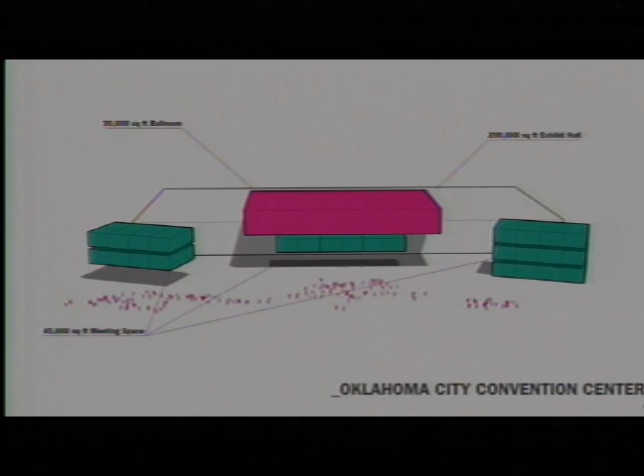We are still meeting the 45,000 square foot meeting room program, the 200,000 square foot exhibit hall, and the 30,000 square foot ballroom. We still have our meeting room program to the north facing downtown. We have a meeting room program to the south anchoring the southern end of the building. And we have our ballroom on top of all of this program, cantilevered over with views to the park. The building is still broken up into three, we'll call it 3.5 levels.

We have the lowest level, which is our exhibit hall, which has our pedestrian entries. We have entries to the north of the building, entries directly across the building, across the park in the center of the building, and into the southern edge of the building to allow for some pedestrian entries down there.

The second level is what we're calling our meeting room mezzanine. It's full of meeting room program. Most of those meeting rooms have access to natural light along the facade. It's where we start to add levels of flexibility within the program, how we can divide up these meeting rooms and create different shaped rooms to accommodate the different events.

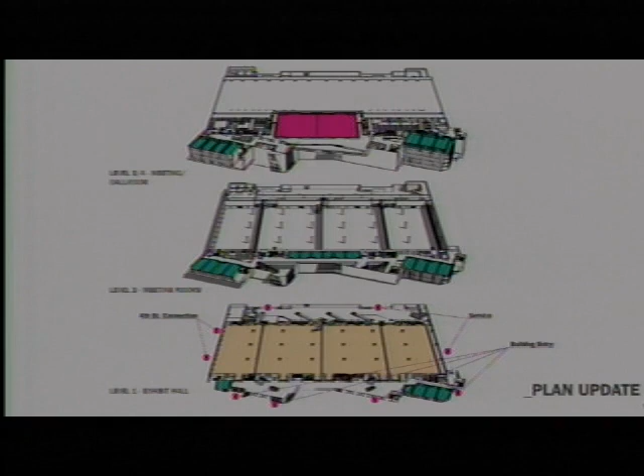And then our uppermost level, along with some meeting room program, is what we're calling our ballroom experience. You can see the purple box up there. The ballroom truly is at the center of the building and does command a lot of attention. You'll start to see how this is influencing some of the architectural moves in the design.

Moving from the design principles to what we're calling our design story, this is the story that's going to start influencing the materials of the building, the architectural forms, and the overall aesthetic of the building you're going to see today. What we've just, through all the times we've been here, it's a shame you don't get to see us do this, because in our office we have images, sketches, and all the research we've done on the site, and just the look and the vibe and the feel of what this means to be in Oklahoma City.

So we've come up with these storylines. One is core to shore: how do you connect the building as an anchor from the downtown corridor to all the development to the south of the building? The next one is the building as the event district: what does it mean for this new convention center, and how does it respond to the potential hotel, the arena, the park development, and how they can connect with each other? And then balanced asymmetry: how does the program within the building start to direct some of the architectural moves and influence the appearance?

And then one of the ones we're most proud of is Earth to Sky. The building truly is unique in that there's not a lot of context around it right now, so the way the building touches the ground, when you see it from the park, and how it reaches into the sky, starts to create a dynamic vision.

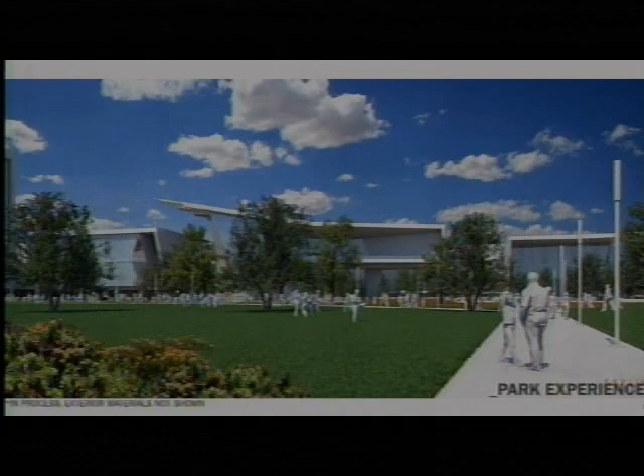So this is that first image many of you have seen. This is standing in the park, essentially right above the amphitheater, looking through the park to the east. You can see the scale of the building and how it rises above the trees in the park, and how the backdrop of the building truly is the blue sky—the building acts as the horizon on the site.

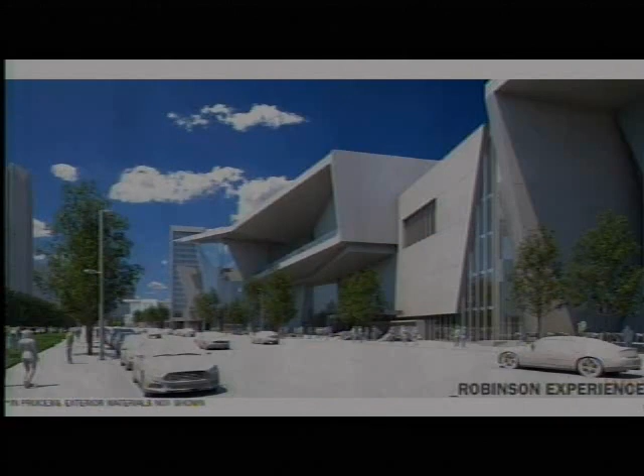This is a good representation of the presence this building will have as the backdrop to the park. Looking north along Robinson, you can see the ballroom's architectural form and how it commands attention while still providing that level of protection for the west-facing condition, anchoring the center of the building.

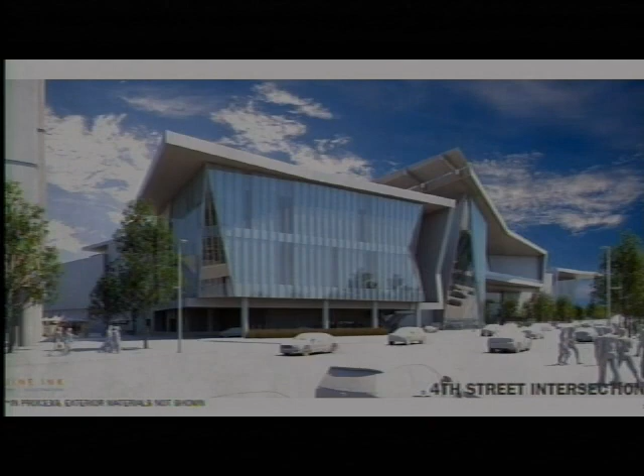Looking south on Robinson, the northwestern corner of the building sticks out and essentially tips its cap to downtown. We've angled all of these meeting rooms to frame specific views to downtown, the park, the Skydance Bridge, and Union Station. This is the first opportunity you see when approaching the building—how it turns its head and looks right at you.

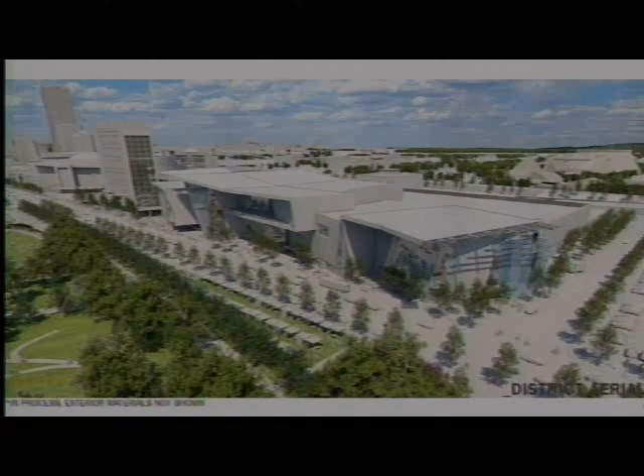It's a dynamic image, exciting because of the scale of the building, and we've broken it down into these unique moments. The building will truly take on a life of its own from these different viewpoints along Robinson.

To reiterate, the event district is something we believe is new for Oklahoma City. When you look at the different activities you can have in the park and how those relate to the expansion to the south, and the potential hotel—obviously the Thunder command a lot of attention here, and Chesapeake Arena has proven to be quite the anchor along Robinson—you see how these buildings can tie in with each other. Our convention center is truly an anchor in this district, and they can maintain this relationship as they develop.

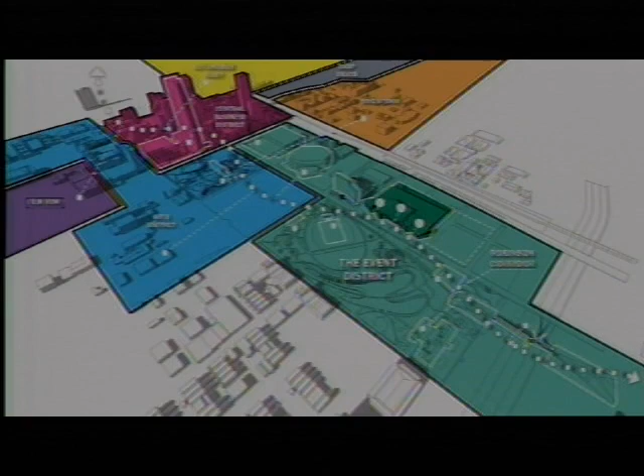It's interesting—when we talk about convention centers, there's an evolution of the building. Convention centers historically were building-focused, so whatever is happening inside, nobody really cares, as long as it's happening inside the building. That's kind of what we have at Cox Center today—it's very stoic and oppressing.

The next generation is event-focused, bringing people into the building and making it a more inviting facility. Where we're at today is city-focused buildings—it's about the inside-out relationship of the convention center and the district, how you let people in and let them out. It's more about bringing people to the center and then sending them out into the city to explore all the amenities around the facility.

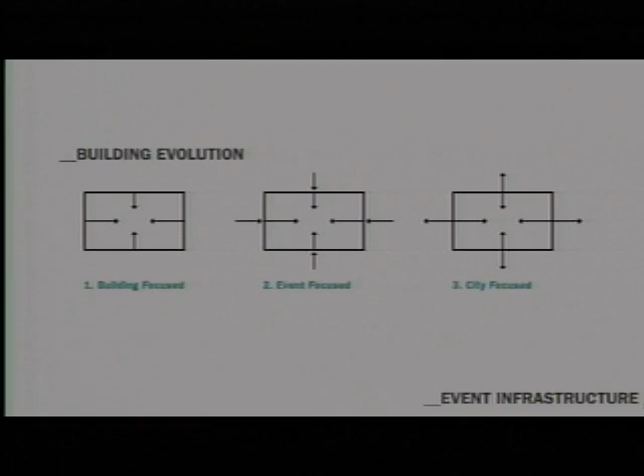To reiterate, we have some of these slides we've been discussing with our subcommittee for quite some time, and we want to show that we're still taking into consideration some of those points even within this updated design of the architecture. We still have our three entries: one to the north, the center entry, and the southern entry.

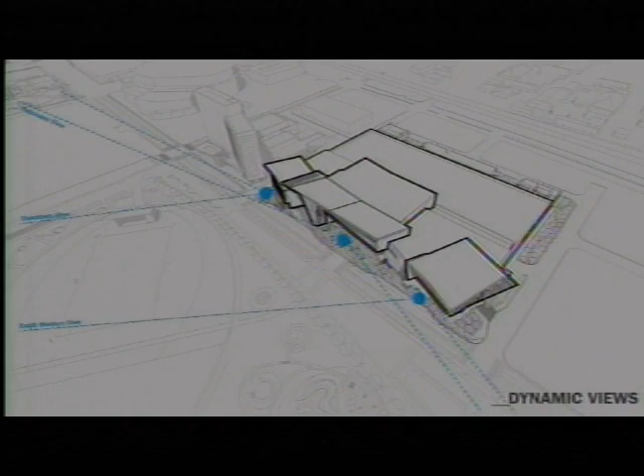The way the building is angled now, we're exposing the interior spaces to some of these dynamic views we've been talking about, specifically the center ballroom view. When standing in that ballroom, you'll have a panoramic view looking west that opens up to the downtown corridor all the way to the Skydance Bridge and Union Station.

From a site planning perspective, because it's such a large site, we're starting to break down the different areas where the building touches the ground. The first is the new 4th Street corridor, which we're calling the Urban Prairie—an outdoor plaza specific to the convention center and hotel. How that building ties in with the hotel becomes an extremely important connection in the event district.

Then there's the entry garden, which we're calling an extension of the park. If you remember, in the park we have a lot of program along Robinson—food trucks, farmer's market, and a lot happening there. So it's our job to respond to that and provide a sister space across Robinson to allow for a back-and-forth relationship.

To the south, we have our Woodland Walk, which we envision as a heavily planted facade—a heavily planted area of the site that adds interest and depth to the southern-facing facade of the exhibit hall as you travel up and down Robinson and Shields.

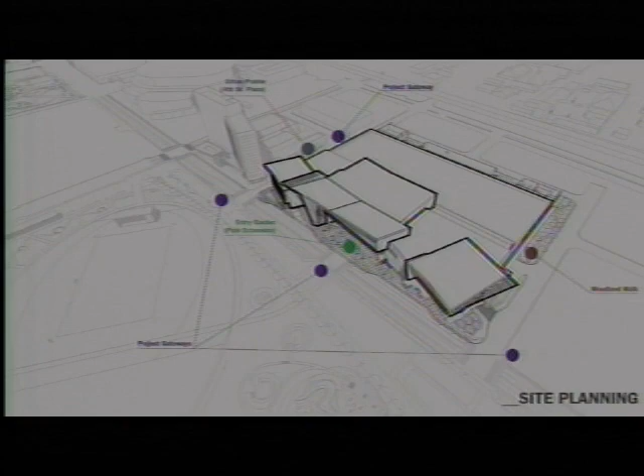As I said before, the building is quite large—the facade itself is approximately 600 feet long, which has a lot of potential to be monotonous and uninteresting. So we've specifically broken this program down into three unique scales.

We have scale B to the north, the stacked meeting rooms; scale C to the south, also stacked meeting rooms; and the ballroom scale, which we're calling scale A. We're being very specific about how the building reads, breaking it down into a more pedestrian-friendly, manageable experience.

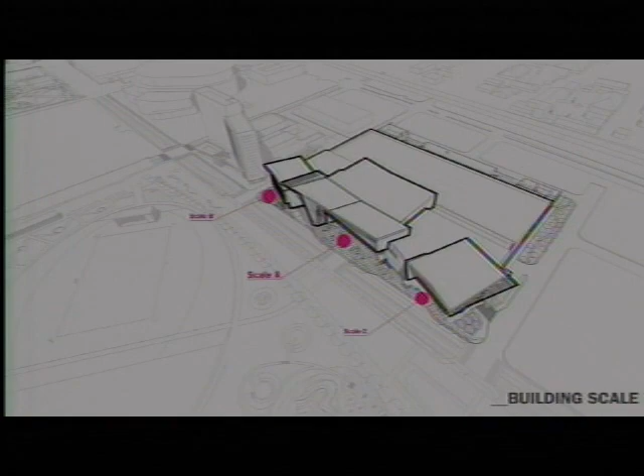The architectural forms are serving a specific purpose—they're a passive maneuver to protect the building from the western-facing condition.

For balanced asymmetry, when we met with our subcommittee back in January, we had almost 40 options, then narrowed down to 12, 8, 3, and finally 1. We created this design together with our subcommittee, shaping how these program areas lay out.

When I go through these diagrams, the first shows the programmatic pods generated with our team, then how those pods influenced the form of the building, and then how we enclose and protect the building.

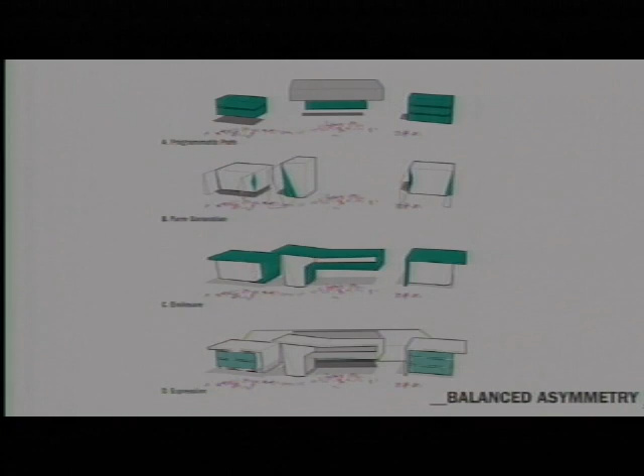After that, the last diagram shows how we can still express that program in the architecture of the building. When you break the design down, it's actually quite simple in its elements, and simplicity is good here because of the scale of the building.

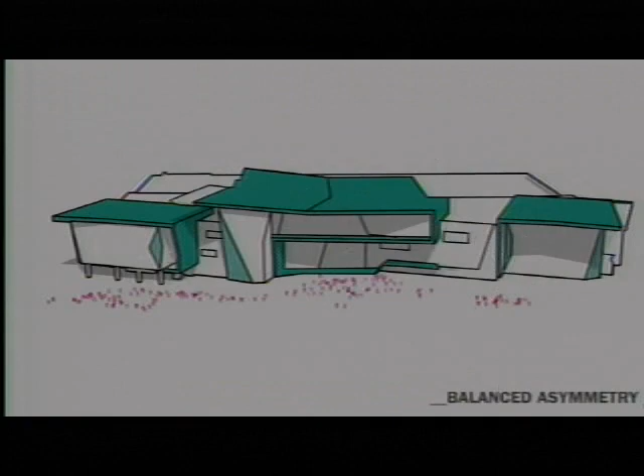As you go back and forth, you can see the blue protective elements and how those start to translate into the actual architecture of the building.

Moving to the 'earth to sky' concept, this starts to influence more of the materiality of the building and how people can engage with the different levels on the exterior of the facility.

We envision the building having a neutral palette—most convention centers do, to allow meeting planners to brand the spaces for their specific shows. However, as the different levels stack, we envision specialty or accent materials that correspond with this design story.

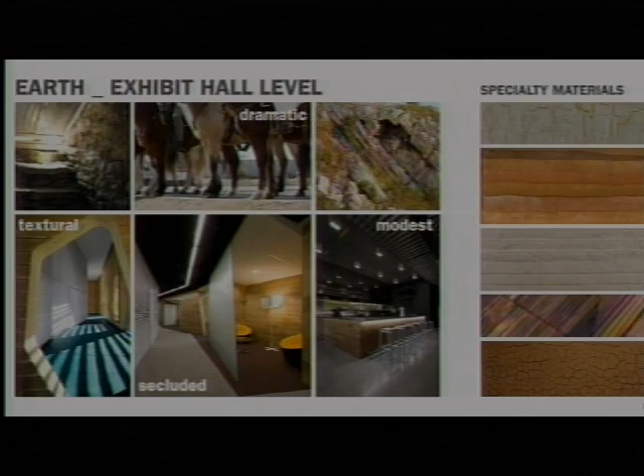When we think about the earth, we think about the lowest level, and we're mining imagery and selecting materials based on that concept—words like textural, modest, dramatic, secluded—to create a true unique experience on what is typically your exhibit hall level, just 200,000 square feet of open space, creating memorable experiences on these levels.

We've also included some white renderings of the interior of the building with the materials pulled off, just to show how some of these spaces look from a volumetric standpoint.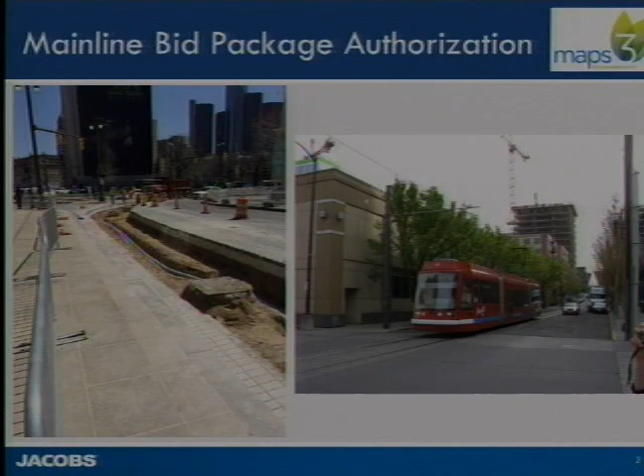This picture on the left is a project that's in construction that we designed in Detroit. A very similar condition in their downtown square, Campus Martius, high profile urban design, high quality urban design, very similar to Project 180. We had a concerted effort to try to minimize the disruption to those improvements that have just been installed in the last 5 years or so. So this gives you an idea of how we're trying to surgically introduce the tracks into the travel way.

The bid package itself includes all the track elements, all the civil improvements, utility relocations, public utility relocations, and a few private modifications, all the electrical systems, the power stations, the overhead wires, also the stops and shelters. And we thought it would be a good idea just to refresh everyone's memory about the alignment itself.

And, oops, I think I needed to go. Thank you.

So we have a little fly-through of the alignment, and the intention here is just to describe exactly the route and the contents of the bid package. So here is Hudson. Oh, I forgot I'm driving. Wow.

There it is. Sorry about that.

On Hudson, we start at the maintenance facility and continue north, essentially in the middle of the road. This is for safety and a more intuitive track arrangement, allowing trains to go back and forth through the maintenance facility to the main line. It's also designed to be convertible, so if there's an extension to the Core to Shore area or further south, we can convert this into a northbound track with an accompanying southbound track on Walker.

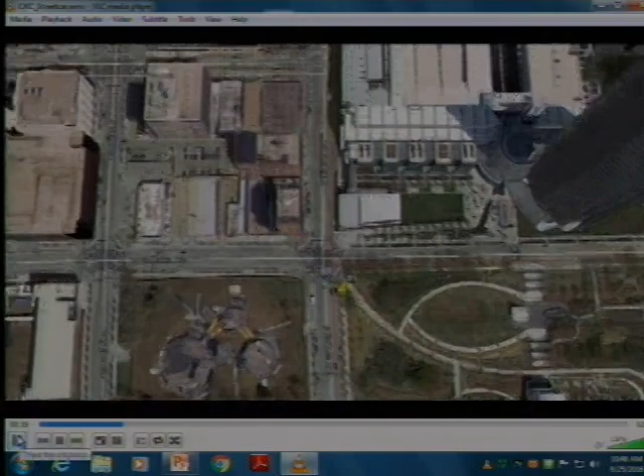The Midtown loop will continue north on Hudson in the right lane, stopping at the library. Nothing too special here - again, we're trying to minimize the scope of the track improvements.

I'll note that all of this segment I've described so far will be wireless. We have the hybrid battery streetcar technology, and this segment of Hudson from the boulevard up to the transit center will be wireless.

At the transit center, stop number 8, is where the wired segment starts. The streetcar will go up the hill by the memorial and stop just on the far side of Robinson, providing that connection to the inbound service at stop number 18 on Robinson - the inbound service once you complete the Midtown loop.

We've built in special provisions for the streetcar to communicate with traffic signals at various locations, first to provide safe maneuvers. For example, at 4th Street and Broadway, taking a left turn with a streetcar - we want this done in a controlled fashion, so we'll stop all traffic while the streetcar makes its maneuver. With that technology, we're also able to manipulate the timing of traffic signal operations and provide more expedient service for the streetcar when needed.

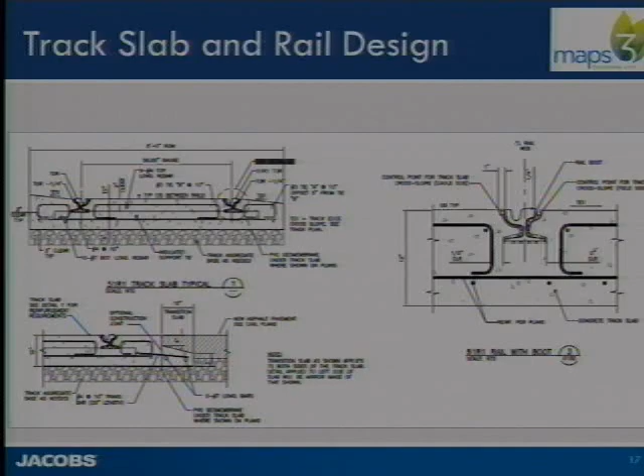So the track slab itself encapsulates the rail. We've already purchased the rail, and delivery of the rail materials will start next month. Generally it's a 12-inch deep concrete section, trying to minimize the excavation that happens in the street. It does have fairly heavy reinforcement, and besides standard pavement design, that's primarily to provide the ability for a utility in the future to excavate underneath the tracks while still maintaining service. That structure provides a spanning capability, designed more like a bridge, so the track can span up to a 10-foot trench. That's been important in our utility negotiations to minimize relocation requirements while still addressing the utilities' needs for access and maintenance.

The tricky part of the tracks is between the rails. We want that to be as flat as possible for as much length as possible, though not in all cases — there are some exceptions. Generally, putting a flat plane into a standard crown of a street will cause you to repave and reshape that street. So we've worked with Public Works on the standards, keeping an eye on minimizing disruption and reconstruction of those streets. The figure at the top of the screen shows how we've achieved this by minimizing construction toward the center of the road and taking up those slopes toward the curbside and parking strip where necessary, containing construction into just the travel lane wherever possible, as my very first slide was showing.

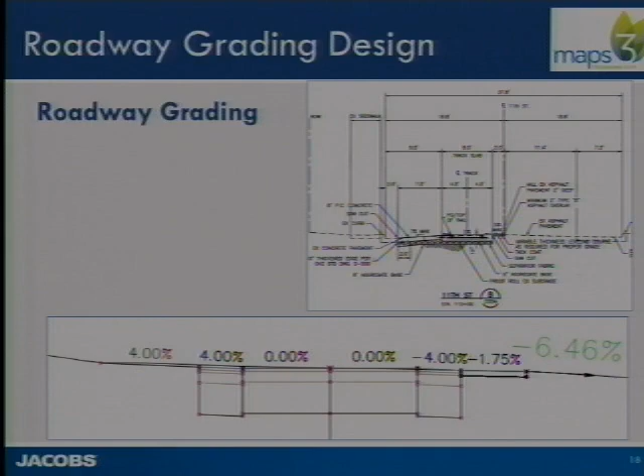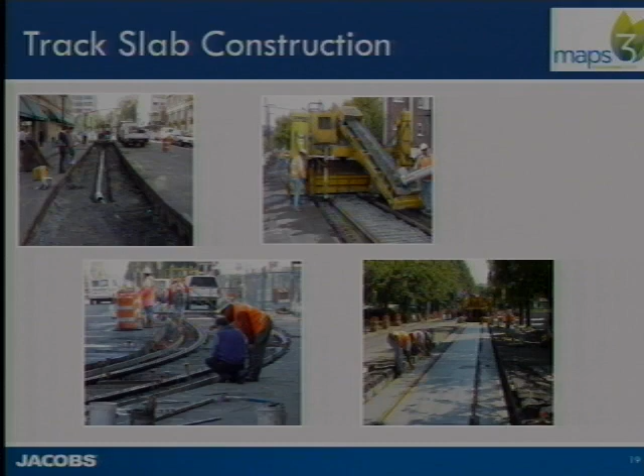There are some public utilities that we're relocating. We took care of most of the water lines that are underneath the tracks, directly parallel underneath the tracks, providing the ability for future developments to access or maintain these lines. Sanitary sewers as well, but in many cases we were able to keep the sanitary sewers in place and just modify the access points. In most cases we got the access points, the manholes, outside of the trackway, which is the best scenario, but in some cases we actually put them between the rails, and then it's just working through an operational agreement with Public Works on their needs for access and times of day when they need to inspect or maintain their infrastructure.

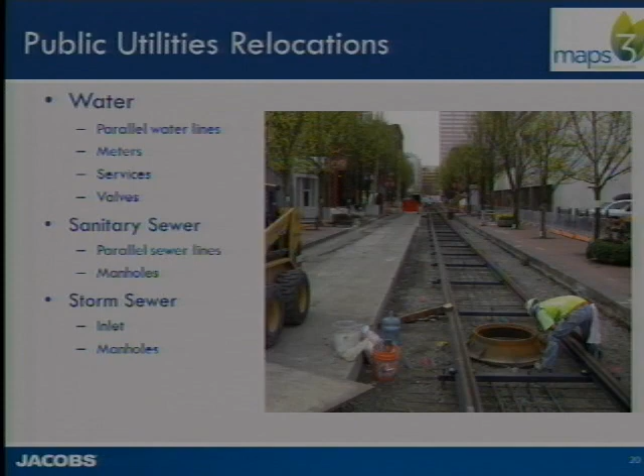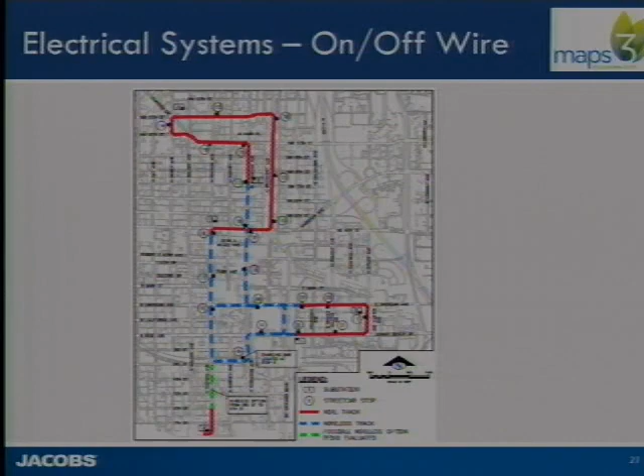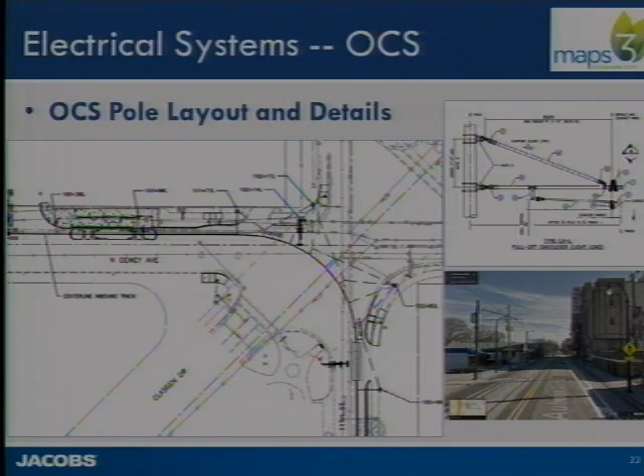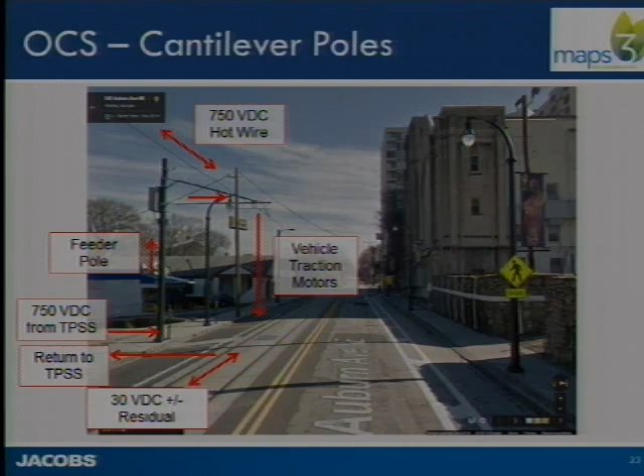There are several slides here about the poles because there's a lot of interest in what these wires will look like, and so we've worked very hard to minimize the number of poles and keep the overhead infrastructure as light as possible. The reason for the wires is that our electrical power stations provide the power, 750 volts of DC current, fed underground to what we call a feeder pole. It goes up to the pole and then services the wire, as you see with the arrows. As the streetcar rolls through, that powers the traction motors of the streetcar to propel it. What comes out at the end is a residual voltage that is then returned through the rail. It's a very low, very safe voltage, but it completes the circuit by traveling through the rail and connecting back to the substation.

This is just an example of one project in Atlanta where we tried to keep that infrastructure very light. There are more support systems through corners or turns, as you can imagine, in order to keep the wire properly positioned over the tracks. But at the request of Public Works, we had a concerted effort to reduce the number of poles along the right-of-way. So we're adding a pole every 80 feet in the wired segments, and we looked at existing street lights and existing or replaced traffic signals, trying to consolidate as many of those existing and new poles as possible. In the end, we eliminated about 100 poles along the right-of-way by consolidating primarily streetlight poles.

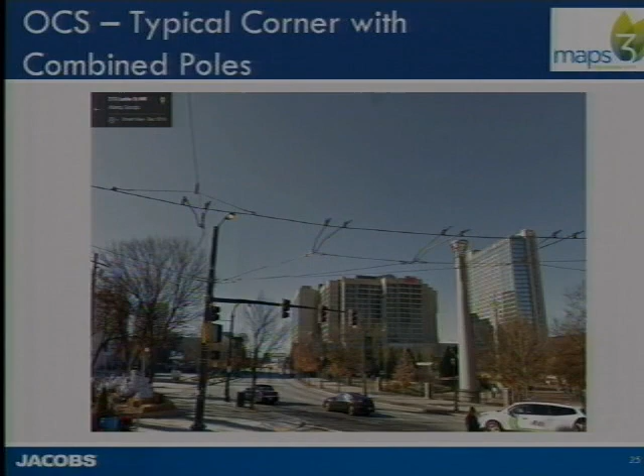Generally the streetcar is close enough to a curb that we use that small cantilever support system, but in the case of Hudson, and maybe one or two other cases, Hudson south of the boulevard, we have what we call span wire - two poles, one on either side, with a supporting wire that stretches between. As I mentioned before, all the poles along the park side have been coordinated and consolidated with the park designer and the Hudson Road designer.

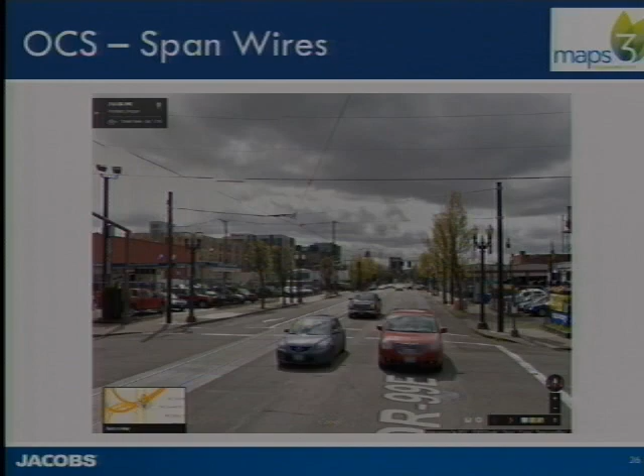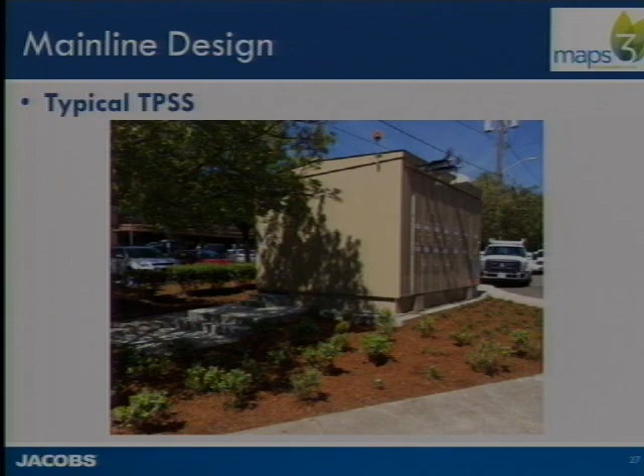The traction power substations are placed about every half mile. They are intended to be smaller and more modest units, about 10 feet wide by 14 or 15 feet long, and maybe 10 or 11 feet high.

We have 6 substations along the route, indicated with the green rectangles here, one at the maintenance facility at the south end. We generally tried to find discreet places, primarily alleys between the streets and the back sides of properties, to keep these discreet in their placement and not affect any future developable land frontage along the streets.

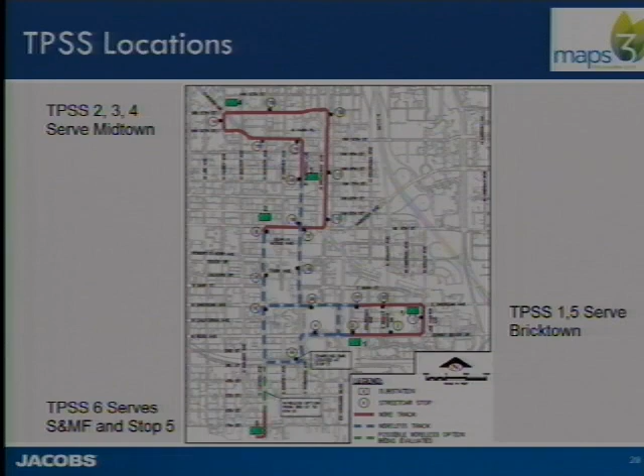The intention is so these platforms can be jointly used by Embark buses. That way Embark can use a bus to supplement the service if there's a big event happening, a utility procedure, or some other disruption along the alignment, and still use the same platforms.

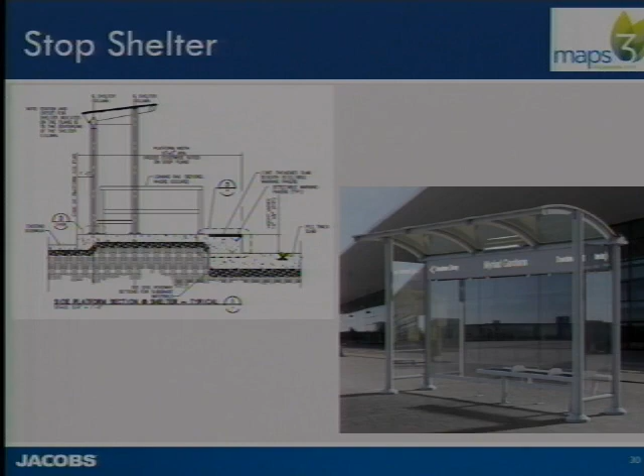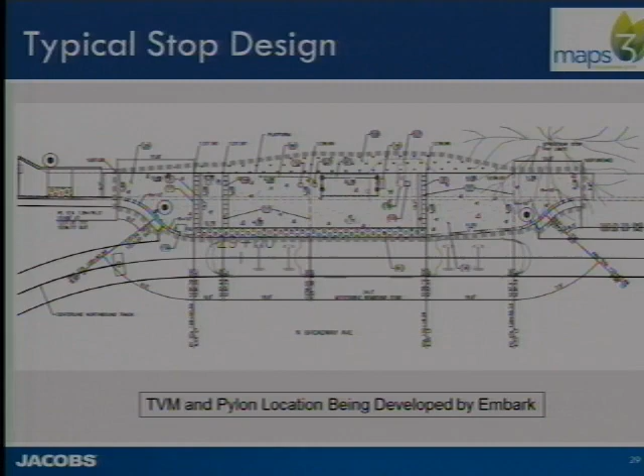Plus a bench. And then outside of the shelter, we have the information pylon that Embark is designing, which we're busily incorporating into the stop layouts, as well as a future potential for a ticket vending machine.

With our plans and specifications that we've provided, we've also provided an update on the cost estimate. We've had new information come in from other projects - a very recent one in El Paso that's now about 6 months into construction, and also a very recent bid in Charlotte. With that information, we are very comfortable with our cost estimates. We are right at the budget.

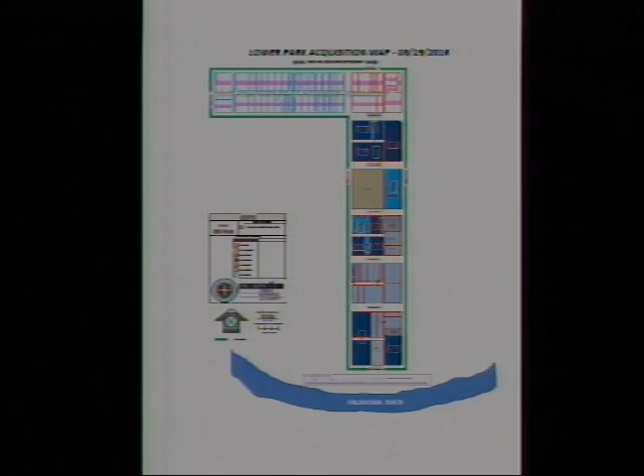Further on your informational items, items C, D, and E are real estate purchases that have taken place, and F and G are easements that were taken for sidewalk construction. I'd like to point out item H is a contract that we took straight to council because of timing issues and when it was bid.

This is for that first bid package for the convention center area. It came in at $279, and we had a budget of $700, so it was a really good number there. Likewise, there's a contract award for mowing, string trimming, and weed control for those properties we buy in the convention center area - just like what we're doing right now in the park area.

So I can answer any questions if you have them. Any questions for David about the informational items? All right, that brings us to David, your update. Anything else you need to add for us?

Very quickly - we've talked about the river, the whitewater. The RFP for operator of Wellness Center number 3 has been scheduled, and the interviews for that have been scheduled. We still have sidewalks under construction. We have two parts of the I-44 trails out for bid, and Phase 3 trails are in design. We've talked about the convention center, and you saw stuff on that today.